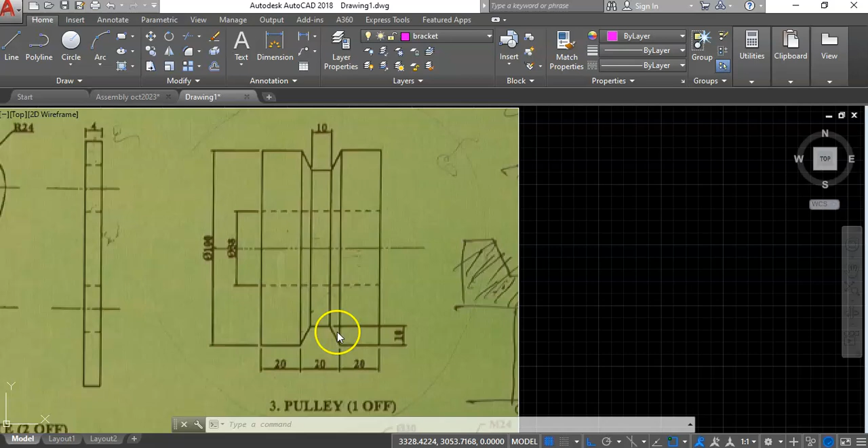Alright, so let's draw the pulley. I'm going to do the front view and the side view. So let's start by doing these parts. I'm going to draw a line that is 100, then offset by 20, by 10, and so forth. Let's do it somewhere here. We have the line command.

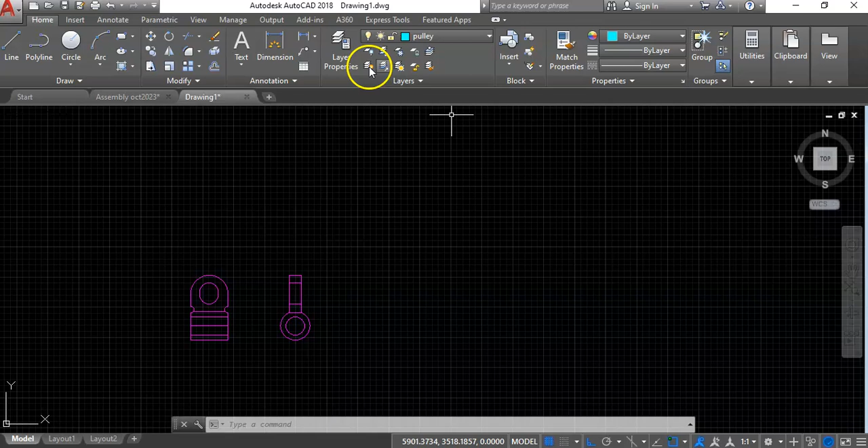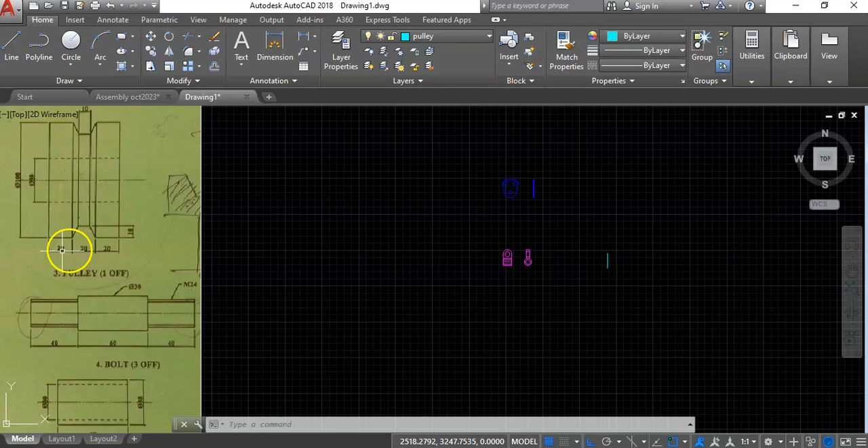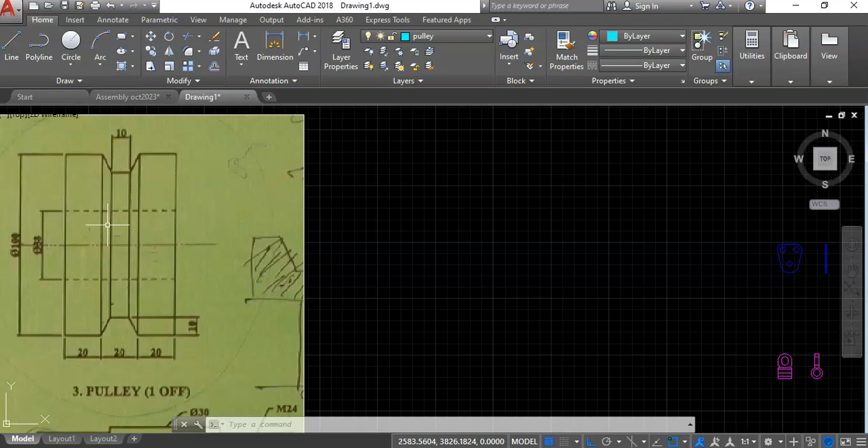First we need to activate the pulley layer. So let's take the line command and do a line of 100 from here, enter. Then next is 20 by 10. I'll do an offset of 20. If this is 20 and this part here is 10, that means we have 5 and 5. So I'll do 20, then offset 20 from there, then 5, then 10, then 5, then 20, and then we are done. I'll offset in that order.

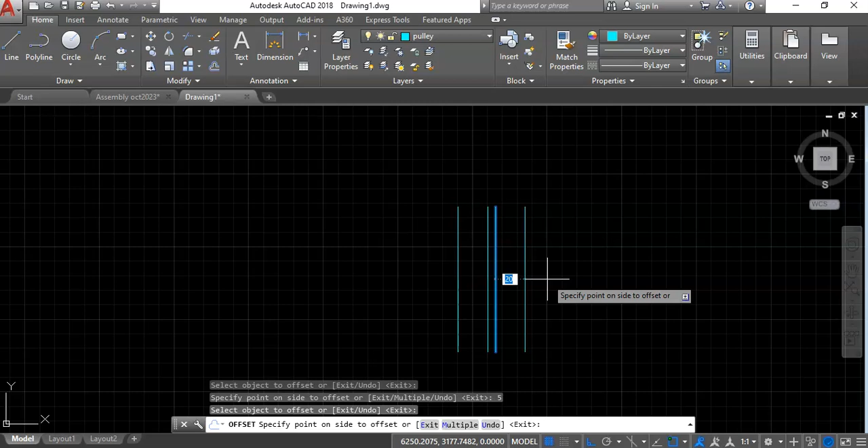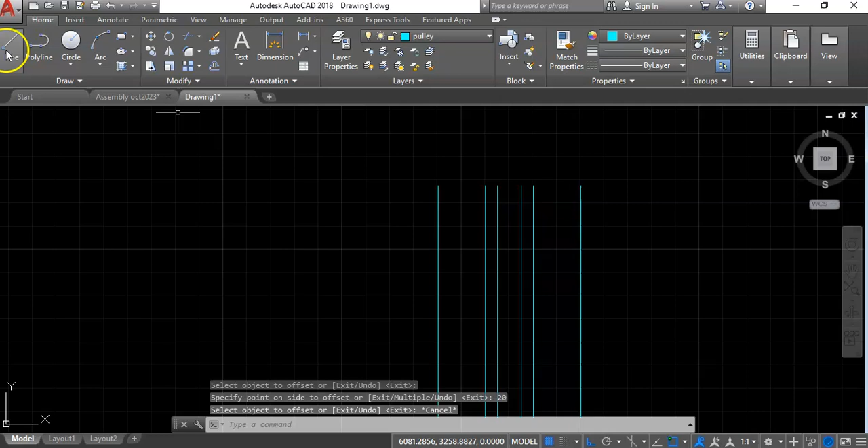So I'll do offset by 20. Then we pick this point here, then again I need to enter 5, then another 10, then 5, correct, then another offset of 20, correct. So with this I'll be able to have the pulley.

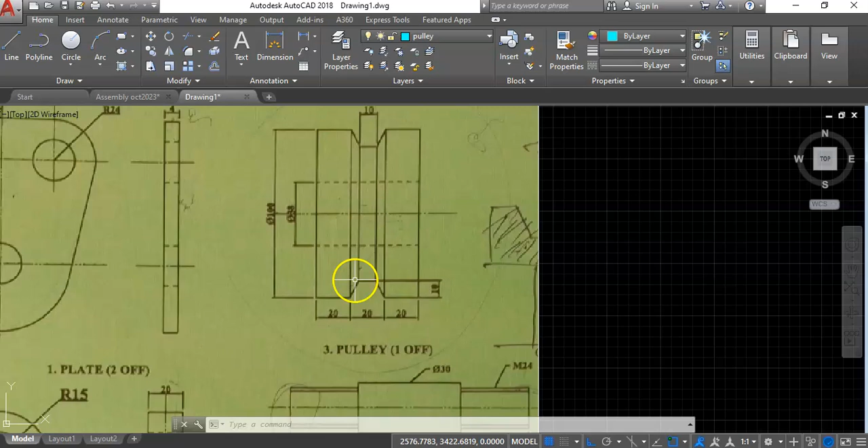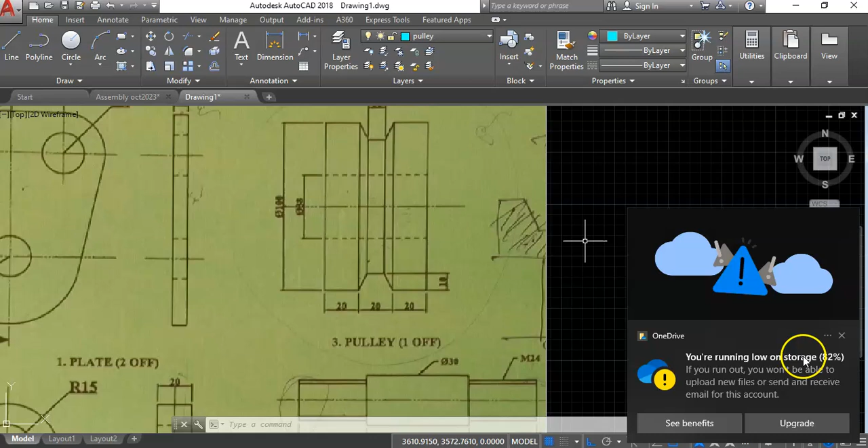Let me just draw these lines and then we'll do a trim. I'll also need to offset these lines, those two lines. Let's take these, offset this line from the top. So I'm taking these 10, offset by 10, and after offsetting by 10, what else? Then I'll do another - if this is 30, from this point to this point is 30, then from this point to this point that will be 35. Plus 30 that will be 65, plus 30, no that won't add up to 100. So what do we do? Okay, so this is 30, 30 minus this, so 35 plus 35 plus 30, that will give us 100, correct?

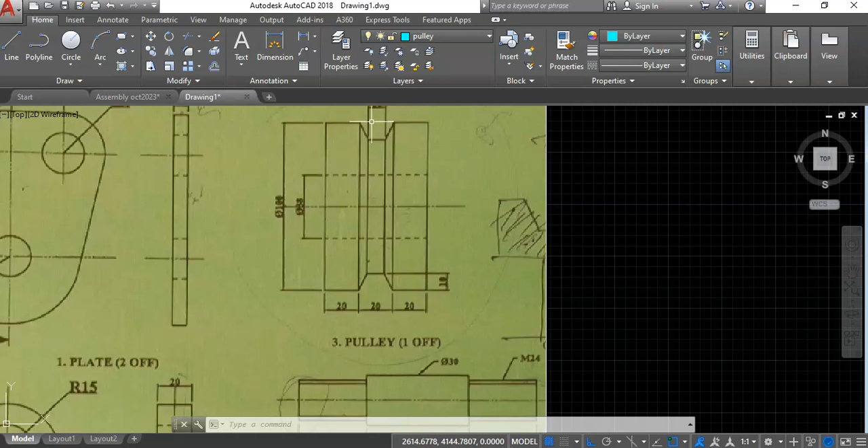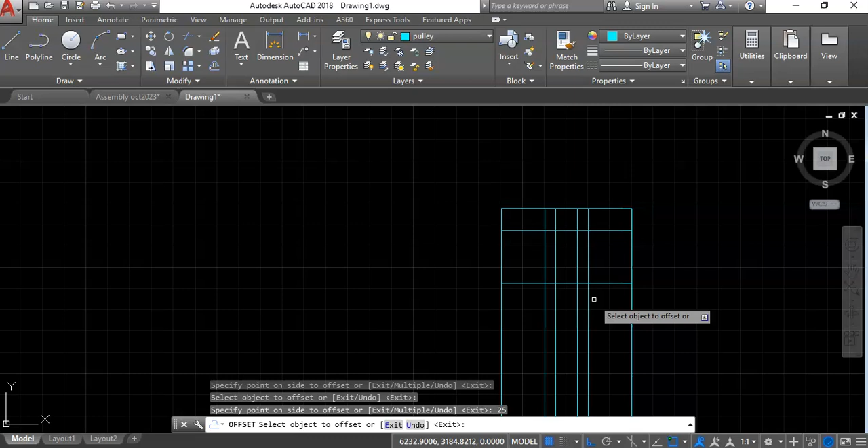So I'll do an offset by 10, then by 25, then 30, 25, and 10. So you have 10, then from there 25, 30, then 25 again, then lastly 10, but that one will just come in by itself. So let's do it. I've already selected that line, then say offset. From the top I do 10, offset by 10, then offset again by 25, then offset again by 30, and offset again by 25, then this one just comes in. So I have these lines.

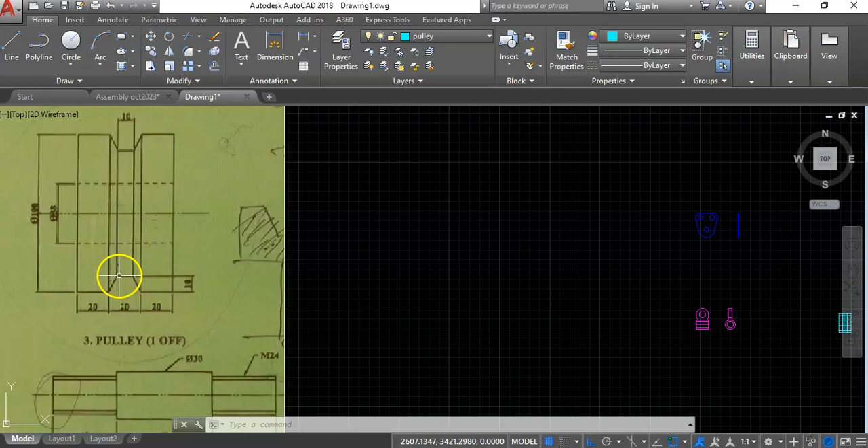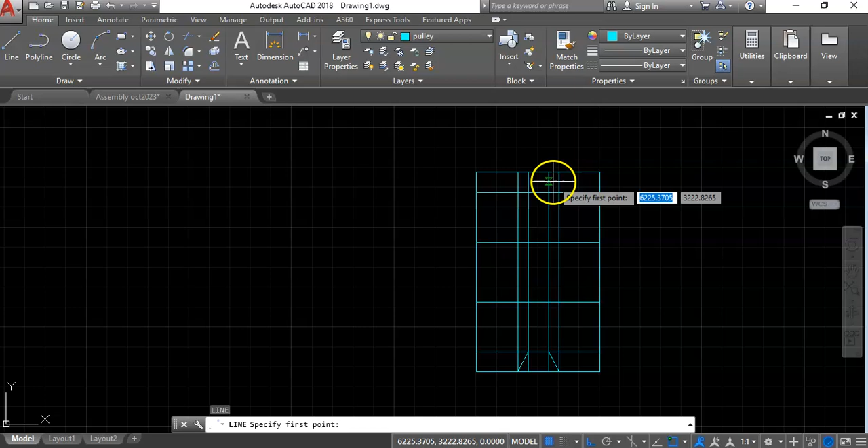Now we need to produce something of this sort. So how do we go about that? We need to check from this point to this point. So I'll draw just lines up, up. So let's do that - from here to this point, line command, from here to this point, enter, enter again, from here to this point, enter, enter again, from this point, this point here to this point, enter again.

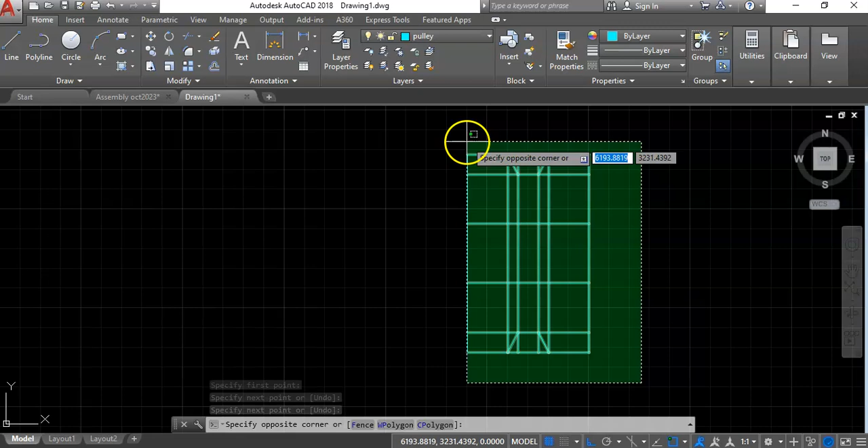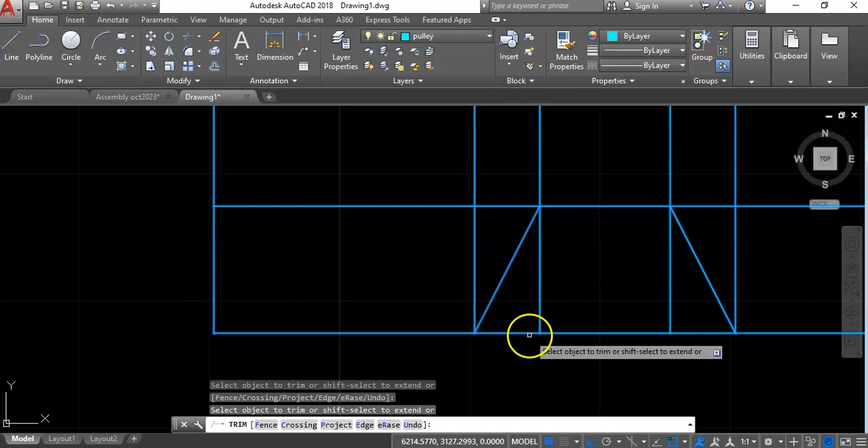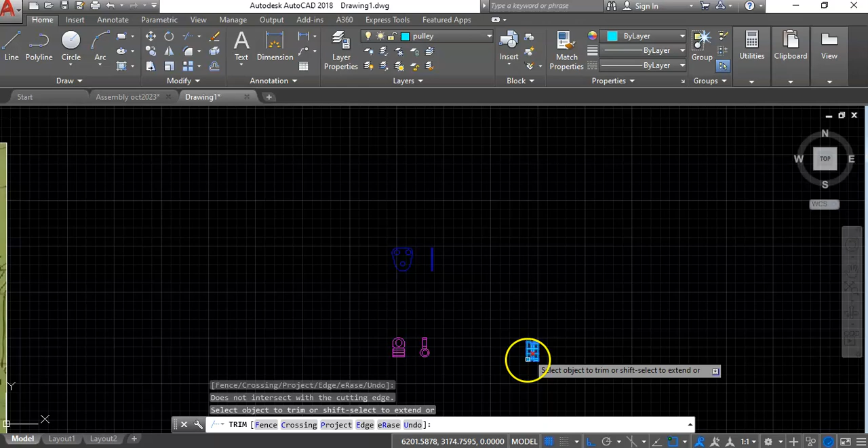The remaining part is to do trim, so select trim. So I don't need this part, this part, like that. I don't need this part here, this part, and this one here. In these lines I will not need them, these ones here. Let's do that for now. I will not need this part. So let's skip, just delete them manually.

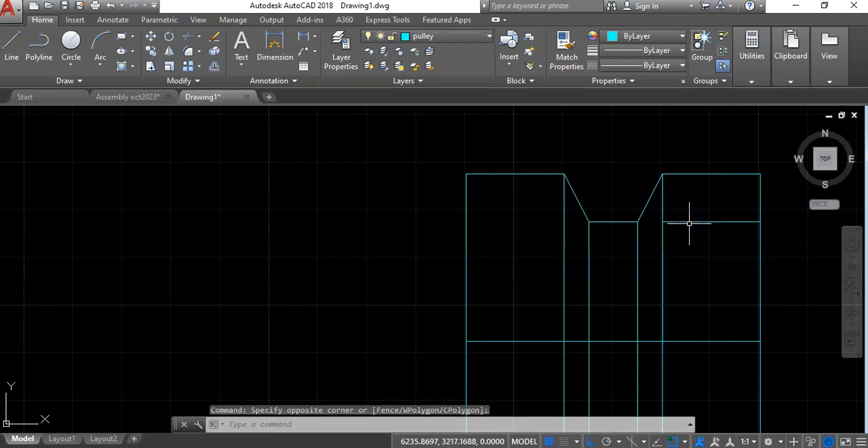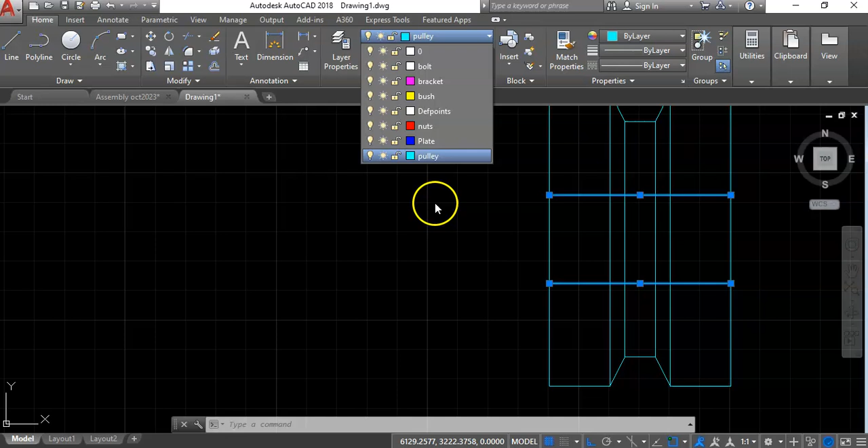Then we also have to delete this one manually. So now I'll be able to - let me put these as center lines. I think I'll do that later on, but we can still do it here. Create another layer called center line. Then assign - let me load the center line here.

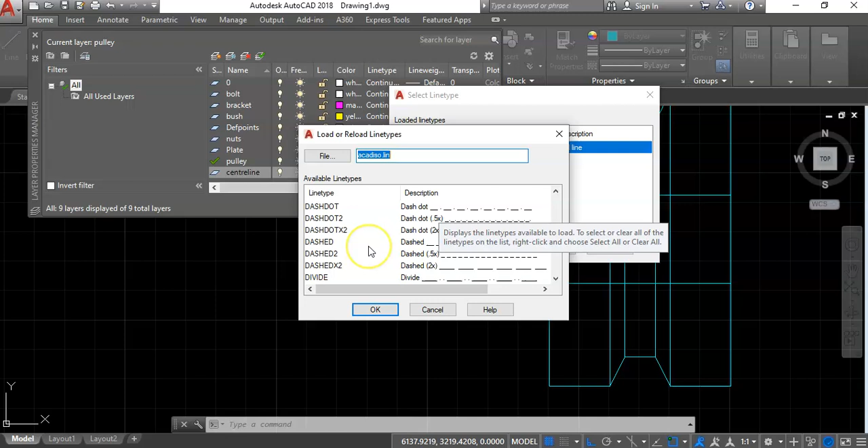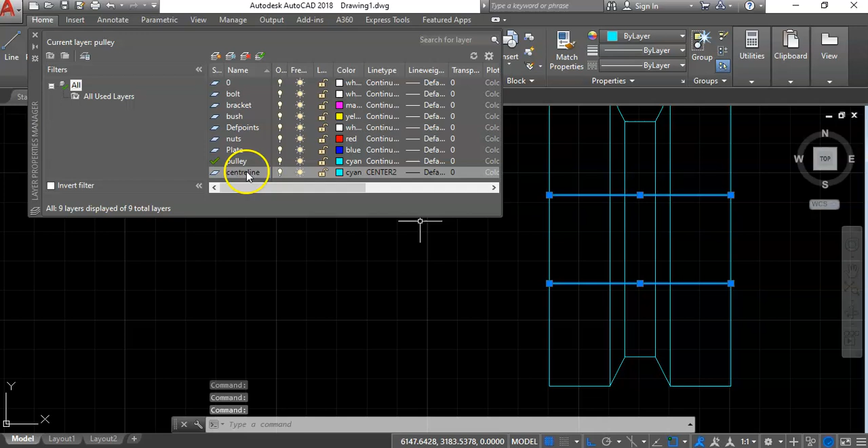So center, okay let's see center. Yes, we can utilize this. Let's utilize this one here. Okay, then just select that line and say okay, so it is activated. So if I want to change that, I'll need to do this - select this, then come here, center line.

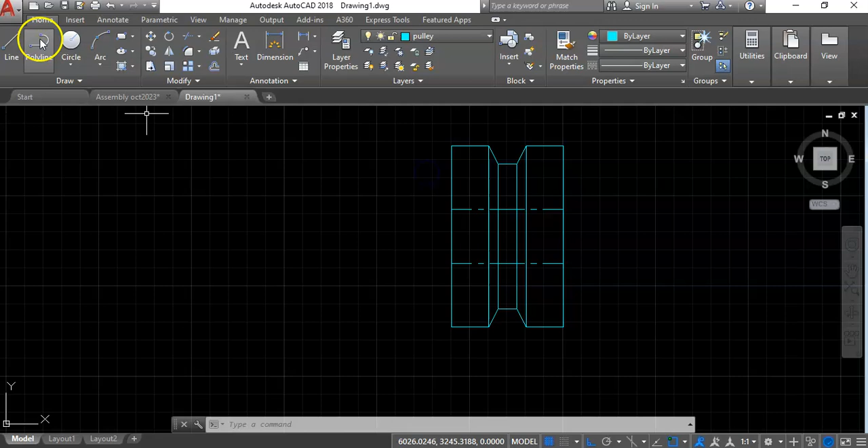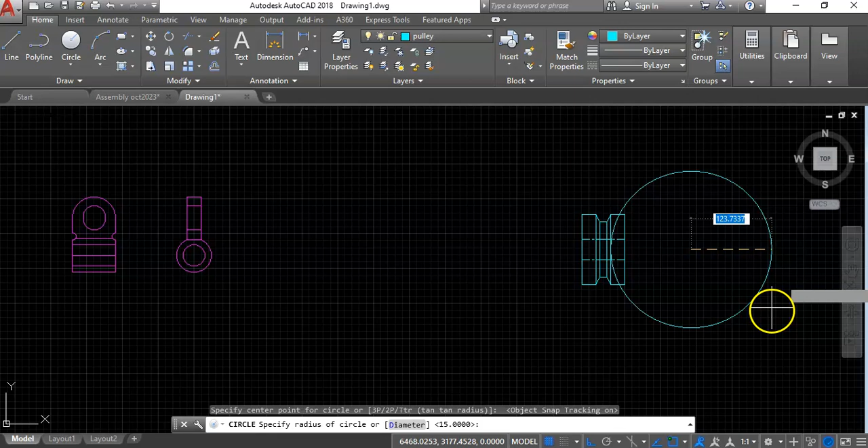So now next is to create the side view of this. I'll go to Pulley, then circle. So I'll have a circle of radius - circle of radius 150, yes let's say 50. Then another circle of radius, you just say enter, then specify center of radius 15. Yes, that is what we have.

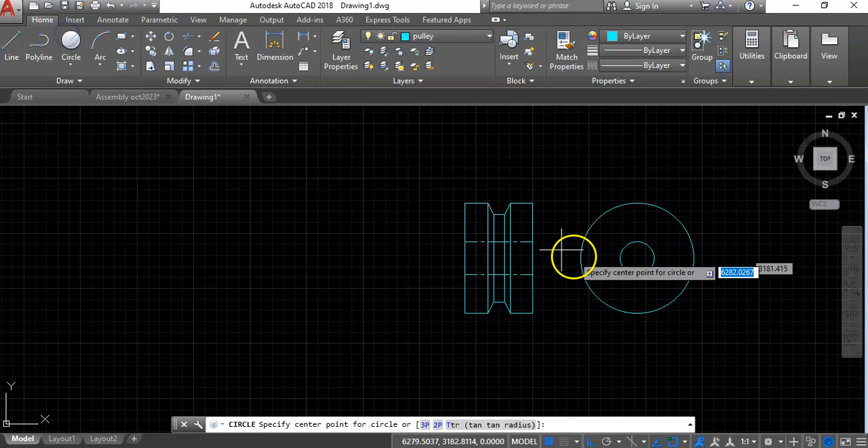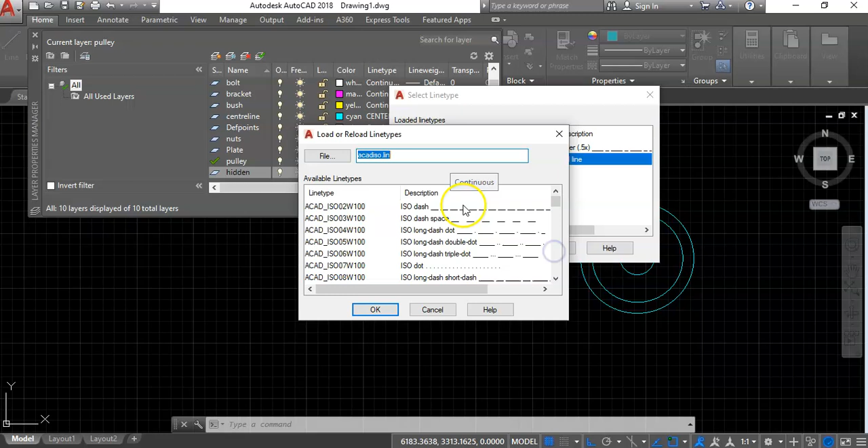Then we also have these parts, but they're not going to be that visible. So 10 times that will give you 20, 100 minus 20 will give you 80. So we draw another circle of radius 40. But this circle we're going to make it - let me hide it. So what do we do? I create hidden, and do this. Yes, so I need to load hidden line here. Let's see these ones, okay hidden, so there we go. So then just select that and come here and assign it hidden.

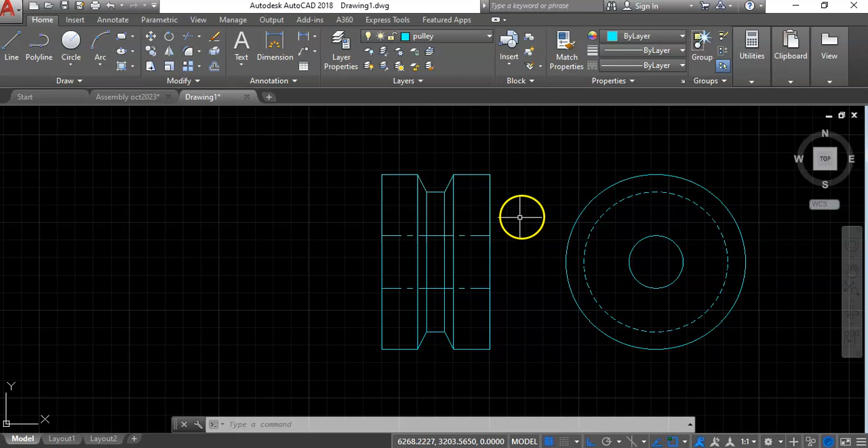So that's it. This is the side view, then this is the end view. So we have the pulley ready, we have the brackets ready, and we also have the plates ready. Okay, then we now need to draw the bolts.